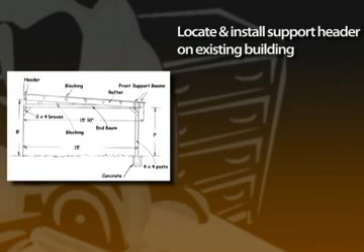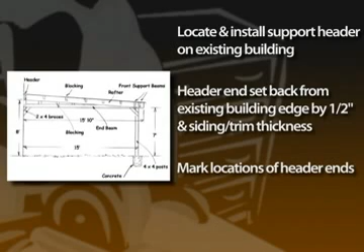The first step is to locate and install the support header on the existing building. The end of the header should set back from the edge of the existing building by about a half inch, plus the thickness of any siding and trim that's going to be added. Mark the location at one end of the header, and then mark the other end. Make sure the header is level end to end. Fasten the header in place with lag screws through the siding and into the studs of the existing building.

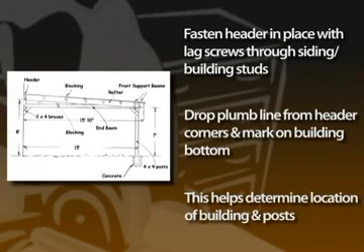Drop a plumb line from each corner of the header and mark this location on the bottom of the existing building. This will give you a starting point to lay out the building and determine the location of the support posts. Beginning at one plumb line mark, attach a string to the building. Measure the length for one end, drive a stake, and fasten the string in place.

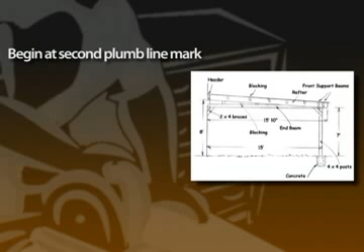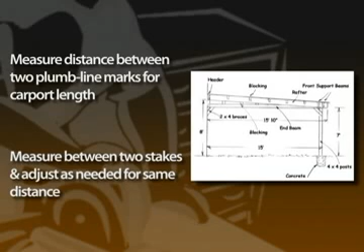Beginning at the second plumb line mark, measure for the opposite end. Temporarily drive a stake and add a second string line. Measure the distance between the two plumb line marks for the length of the carport. Measure between the two stakes and adjust the stakes as needed to achieve the same distance. Make sure that the carport is laid out square with the existing building.

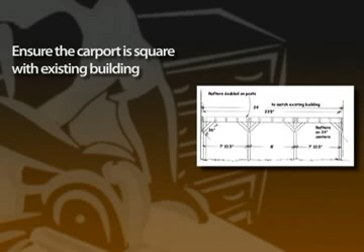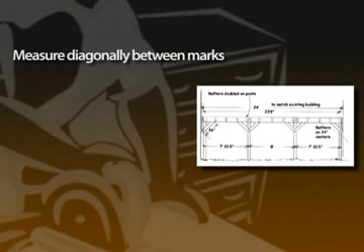One method of ensuring square is with right-angle string lines. Beginning at one of the plumb line marks, measure 3 feet out from the building on the string and mark this with a felt tip pen. Measure 4 feet along the building wall and mark this measurement as well. Measure diagonally between the two marks. This measurement must be 5 feet to create a square corner. Move the string and stake in or out to achieve the correct measurement. This creates a square corner for one end of the carport and determines the location of the corner post.

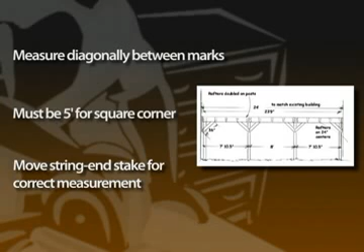Repeat for the opposite end and corner post. Then, again, measure between the two stakes to make sure that the length is correct. You can also check for the squareness by measuring diagonally from the plumb line marks to the opposite outside corner locations. The measurements should be the same.

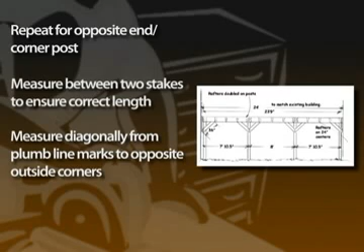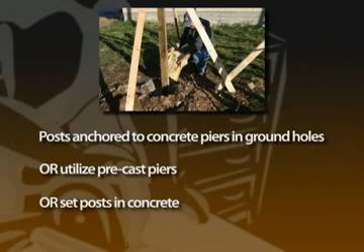With the corner post locations determined, run a string line from corner post to corner post and mark the location of the other 3 posts. The posts can be set on and anchored to concrete piers poured in holes in the ground, or you may be able to utilize precast piers. Another method is to set the posts in concrete. In this case, pressure-treated posts must be used. Again, check with the local building authorities as to the method suitable for your area.

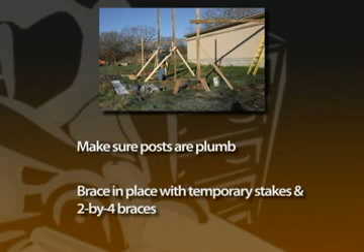Regardless of the method of erecting the posts, make sure that they are positioned correctly to create a square construction, again checking with a string and the triangular method. Also, make sure the posts are plumb, bracing them in place two ways with temporary stakes and 2x4 braces.

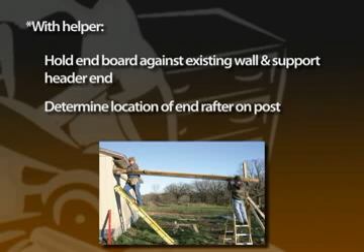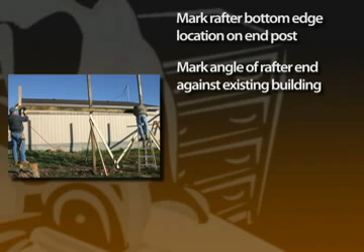With a helper, hold an end board or rafter up against the existing house wall and against the end of the support header. Determine the location of the end rafter on the end post, as per the pitch or roof height that's needed. Mark the rafter bottom edge location on the end post. Also mark the angle of the end of the rafter against the existing building. It must be cut so it will fit snugly against the building wall.

Measure for rafter length, allowing for overhang, and cut the angle. Cut the same angle on the outer end of the rafter as well. Repeat for the opposite end of the building. Then, use one of the cut rafters as a pattern to cut the remaining rafters.

Fasten the front support beam in place to the posts, locating it below the rafter bottom edge line marked on the post. This beam is actually made up of 3 12-foot lengths on the building shown. Make sure the beams are level.

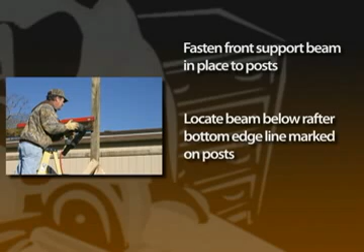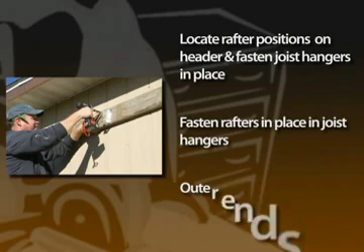Locate the positions of the rafters on the header and fasten joist hangers in place. Fasten the rafters in place in the joist hangers, with their outer ends resting on the outer support beams. Fasten the opposite end of the rafters to the support beams with metal hurricane bracing plates. Cut the top of the post level with the rafters.

Fasten a second inner support beam up against the bottom edges of the rafters and to the inside of the posts. Cut the end support beams. Note the outer end may have to be cut at an angle to fit up and under the rafter, depending on the roof height and the pitch.

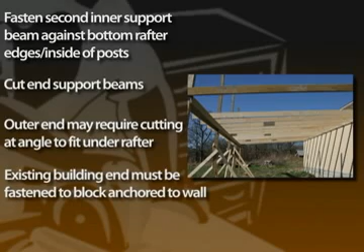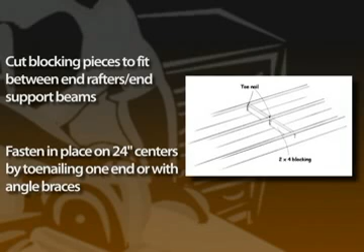The existing building end must be fastened to a block anchored to the existing wall. The outer end is fastened to the post and/or rafters. Cut blocking pieces to fit between the end rafters and the end support beams. Fasten in place on 24-inch centers by toe-nailing one end, or use angle braces.

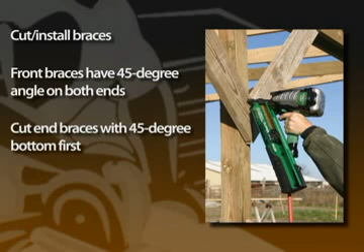Next, cut and install the braces. The front braces have a 45-degree angle on both ends. The end braces are best cut by first cutting the bottom 45-degree angle, positioning a brace in place, and marking the top angle to fit the end beams.

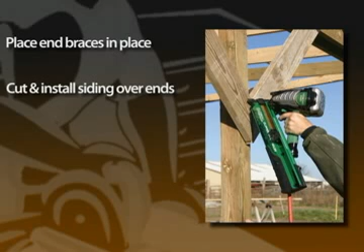With the end braces in place, cut and install siding over the ends. You may also want to add trim around the ends to match the existing building. A fascia board is fastened to the front of the rafter ends to finish off the outer end.

The building shown was covered with metal roofing. The roofing was brown to match the shingles of the existing building. Other choices include a variety of polycarbonate materials, such as Suntuf. Remember, measure twice, cut once, be safe, and thanks for watching.